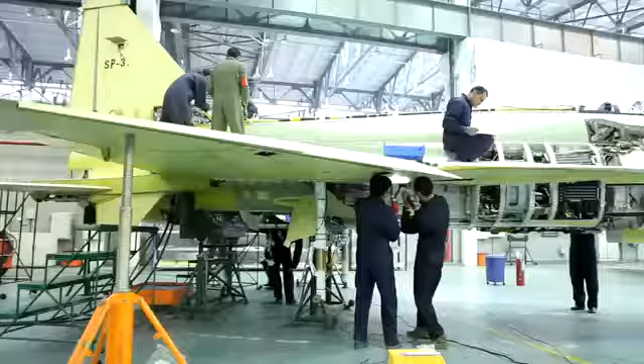Established 40 years ago, PAC is an aviation engineering organization equipped with aircraft, subassemblies, and avionics components manufacturing and MRO services, encompassing products ranging from primary flight trainer aircraft Mushshak and Super Mushshak to modern multi-role jet fighter JF-17 Thunder aircraft, along with aero engines and airborne avionics.

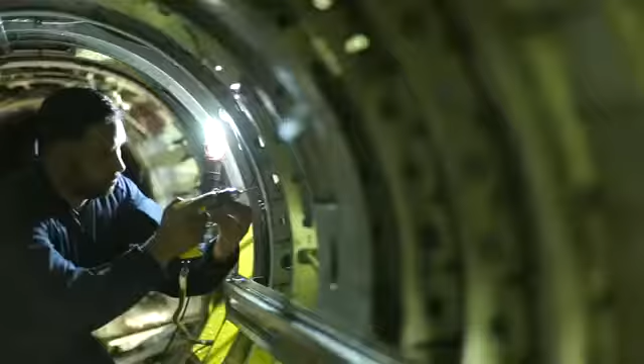The engineering setup is equipped with modern, state-of-the-art machines and established processes certified by International Aerospace Quality Standard AS 9100 Revision C, ISO 9001-2000, Boeing Quality Management System and NADCAP, etc., to name a few.

Precision machining, sheet metal work, composite and rubber parts manufacturing, special processes, surface and heat treatment facilities are the strategic business units of the organization.

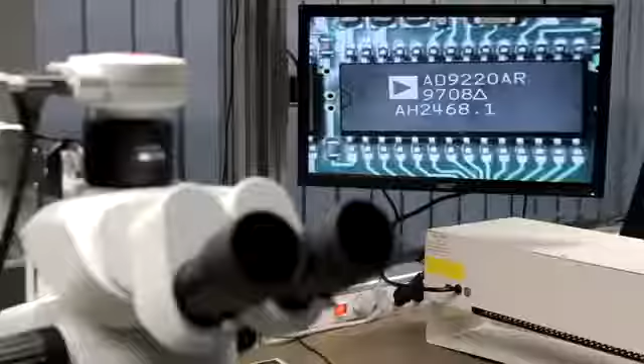PAC values its customers and believes in working closely by extending cost-effective engineering solutions through highly skilled human resources and advanced engineering processes at the most economical cost.

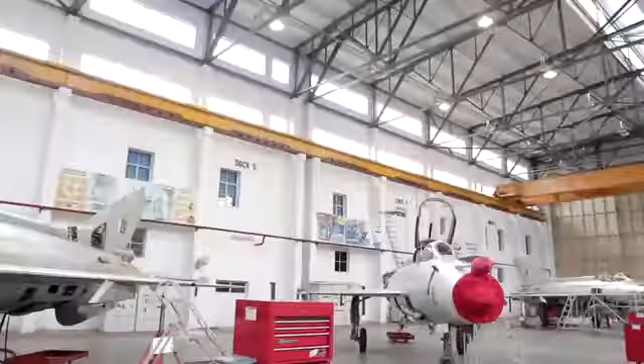Aircraft Rebuild Factory was established in the early 70s in collaboration with the People's Republic of China. Initially, the factory started overhauling F-6 aircraft, and with an ever-growing sphere of responsibility, the factory undertook the task of overhauling A-53, FT-5, Y-12, K-8 and F-7 aircraft variants.

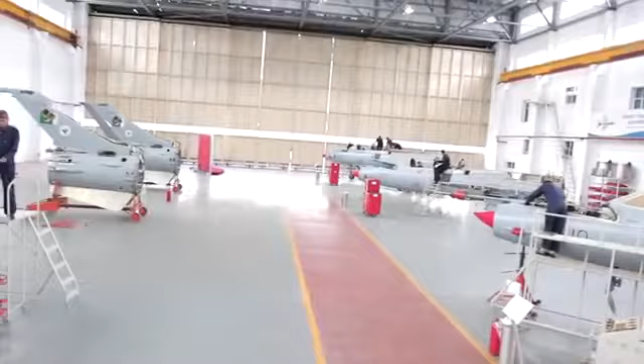Since its inception, ARF has evolved into a center of excellence for maintenance, repair and overhauling of Chinese aircraft, standing tall amongst MRO organizations in the world.

The MRO setup has a number of accreditations to its acclaim, which guarantee quality production. It is not only fulfilling the needs of Pakistan Air Force, but also undertakes overhauling and repair tasks of friendly countries, namely Sri Lanka, Zimbabwe, Nigeria, etc.

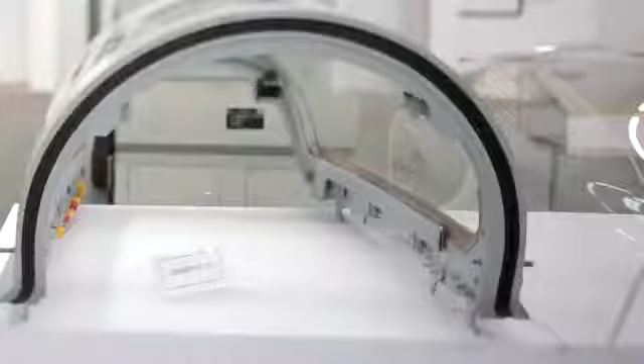The core facility has rich experience of manufacturing and overhauling canopies and windshields of Chinese T-37, Cessna, IL-78 and Mirage windshield partitions. It has also acquired the technology for manufacturing single-piece windshield. The competency is completely self-reliant and has ensured zero foreign dependency.

Production Support Group at ARF is a hub of metal parts manufacturing with diversified services like CNC and conventional machining centers, forging and casting, surface treatment, and NADCAP qualified heat treatment facility.

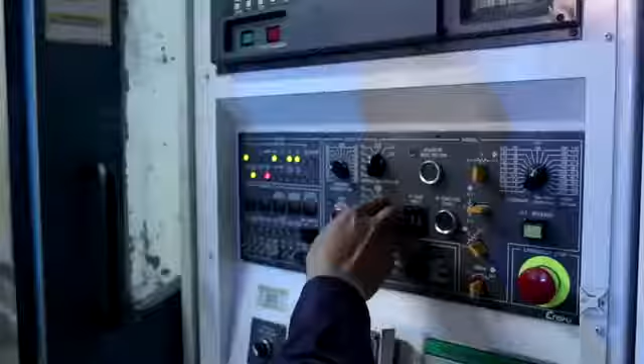Precision Machining Complex is a Boeing Quality Management System certified CNC setup capable of manufacturing aviation and military standard aluminum, steel and titanium alloy parts by using the latest CAD/CAM software.

The products are qualified by utilizing state-of-the-art coordinate measuring machines. PMC is manufacturing parts for Chinese origin fighter and Boeing 777 aircraft.

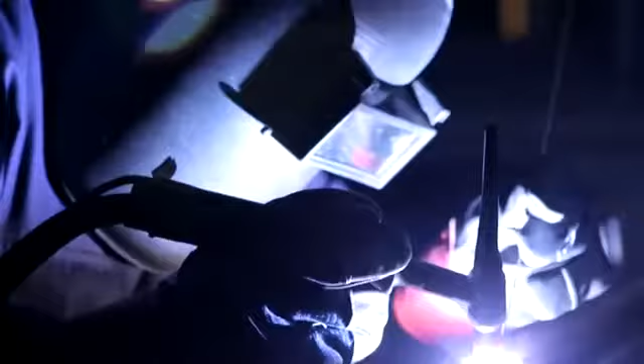Drop tank manufacturing facility is capable of fabricating supersonic tanks along with repair and testing of metal tanks for modern fighter aircraft. It features a wide array of sheet metal processing and welding facilities along with expertise in argon arc, seam, spot and electric welding processes.

Stringent stage-wise quality control ensures achieving the highest of aviation standards.

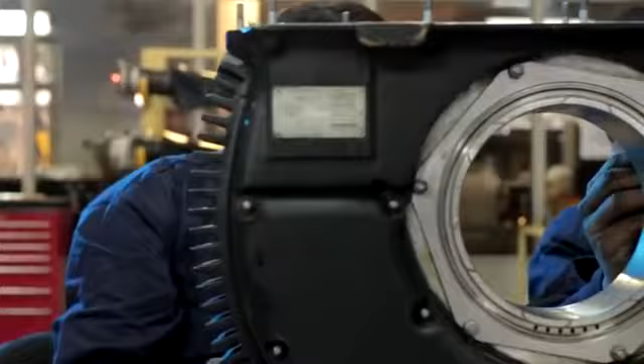ARF has progressively ventured into commercialization and acquisition of modern technologies. Establishment of the C-130 propeller overhaul facility is a recent success story in this field. It has been established in collaboration with Derco Aerospace and is certified by Hamilton Sundstrand. The facility has a broad capability spectrum and is fully conversant with latest aviation technologies.

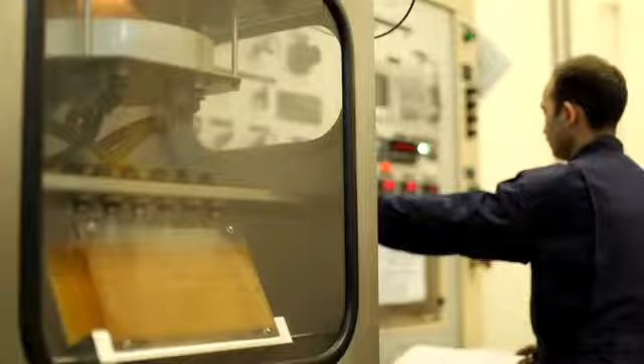Other than overhaul of C-130 propellers, it is also carrying out repair, fabrication, rework and overhaul of its accessories, including pump and valve housing. With the addition of quick engine change overhaul, it has become a state-of-the-art facility that is being offered to friendly countries as well.

Harness Manufacturing and Rework Center manufactures and repairs wiring harnesses of various types of aircraft. The capability spectrum includes a wide variety of harnesses. A harness is a complex combination of wires and connectors. This task is very delicate and requires high skill levels.

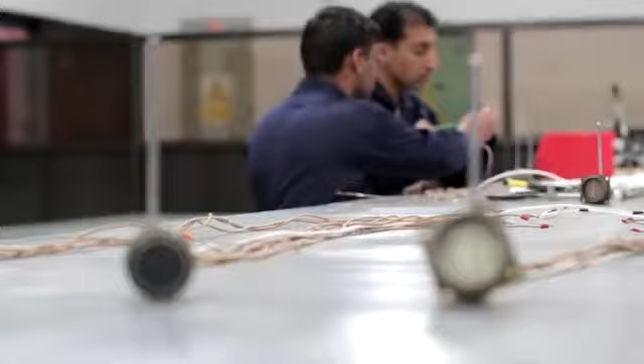Elaborate testing of all manufactured and repaired harnesses is carried out. The work center is qualified for rewiring of used aircraft with new harnesses. Equipped with laser marking, thermal transfer printing, and automated testing facilities, this work center provides all modern technologies under one roof.

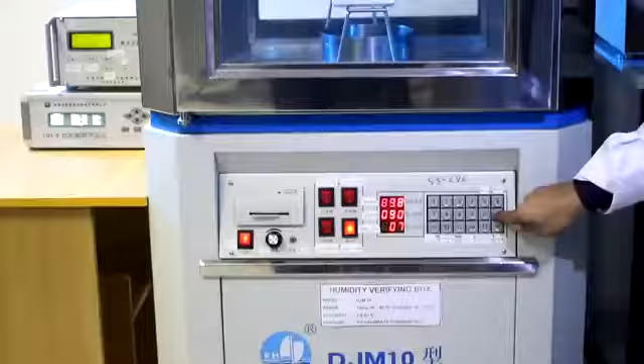Metrological Center ARF is one of the leading calibration and testing facilities in the defense sector of Pakistan for calibration of PMEs and testing of aviation and general industry parts. It is an ISO 17025 accredited laboratory.

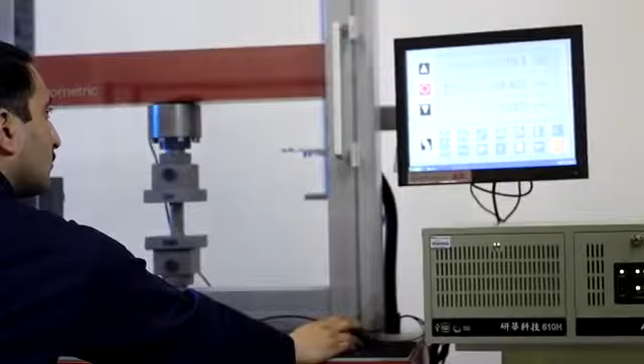Capabilities of this work center include physical, chemical, metallographic and non-destructive testing, besides calibration of PMEs related to length, pressure, mass, volume, force, temperature and frequency. The standard equipment used here has international traceability for its accurate functioning.

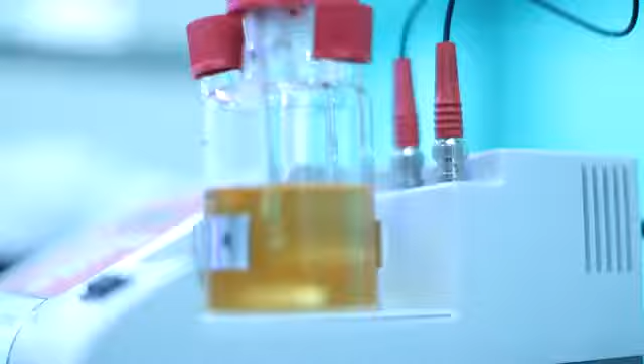It extends calibration and testing services not only to PAC and Pakistan Air Force, but also to various reputed public and private sector Pakistani and foreign organizations.

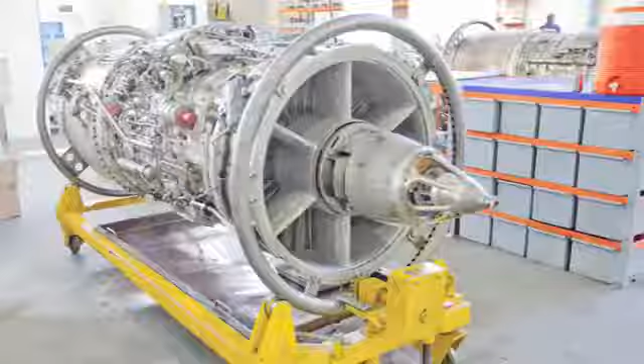Mirage Rebuild Factory was conceived in 1974 for in-country overhauling of Mirage aircraft and has ever since evolved into a center of excellence for maintenance, repair and overhaul of military aircraft and jet engines. It is duly certified by Dassault Aviation of France.

The process begins with the complete disassembly of the aircraft. The parts, components and accessories removed from the aircraft are routed to specialized setups for complete strip-down, stringent inspections and comprehensive repairs as per the overhaul manuals.

During the process, components that can be repaired undergo extensive repair procedures. In case parts cannot be repaired through any of the repair schemes, they are replaced to ensure perfect health of the aircraft. After assembly, the operation of each component is verified by extensive testing.

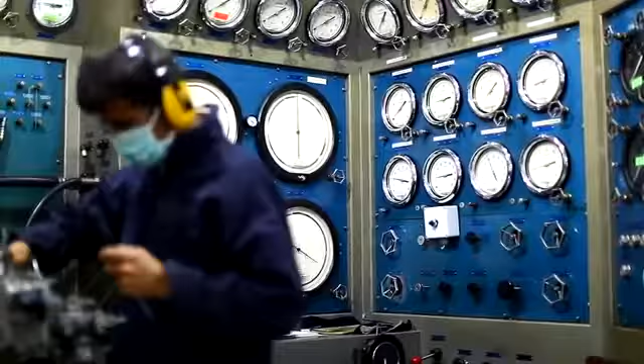The operation of these components is simulated on specially designed testers. These testers replicate close to actual operating conditions which these components experience on a flying aircraft.

Results of testing achieved on these components are strictly monitored, and it is ensured that the achieved results are within the prescribed limit set by the manufacturer.

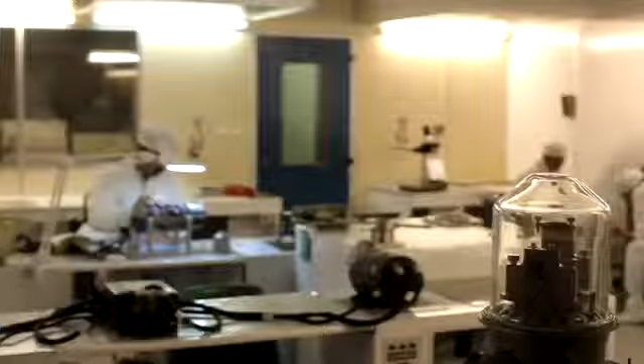The highly precise components requiring overhauling in a dust-free environment are overhauled in a special facility. The atmosphere in this facility is cleaned continuously to achieve the required air cleanliness standards.

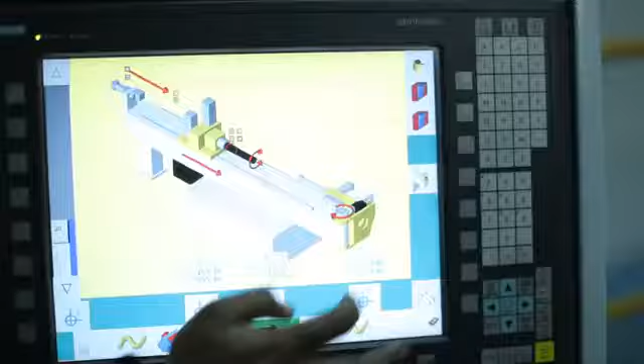The overhauling of aircraft is never complete without repairing and replacing the worn-out hydraulic and fuel pipes. MRF has established a 5-axis CNC-controlled pipe bending and fabrication facility capable of automatically modeling and manufacturing all aircraft hydraulic or fuel pipes. The modeling software interprets the model of the pipe.

The fabrication module uses the interpreted design to prepare new pipes of required dimensions and angles from straight lengths of pipes.

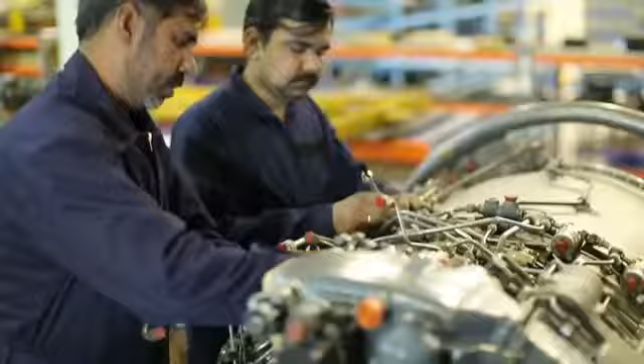To achieve self-reliance, MRF embarked upon the uphill task of establishing the all-encompassing setup for overhauling of engines of Mirage aircraft. Duly certified by SNECMA of France, the engine overhaul setup has become the backbone of Mirage fleet operations of Pakistan Air Force. Like the Mirage aircraft, the Atar engine is also stripped down to individual components.

All components undergo a thorough cleaning process to remove the contaminants accumulated during flight on the aircraft. The cleaned parts undergo non-destructive inspections to identify the existing defects.

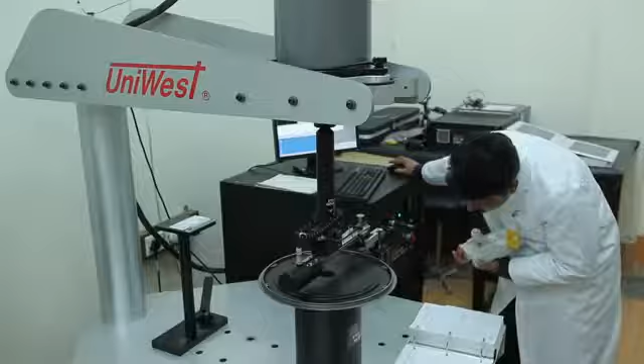Highly specialized radiographic inspection techniques identify even the minutest cracks existing in the parts. The radiographic machine is equipped with a robotic arm to position the part for accurate identification of subsurface cracks.

An elaborate setup of specialist NDI techniques is available for identifying microscopic imperfections in aircraft and engine parts.

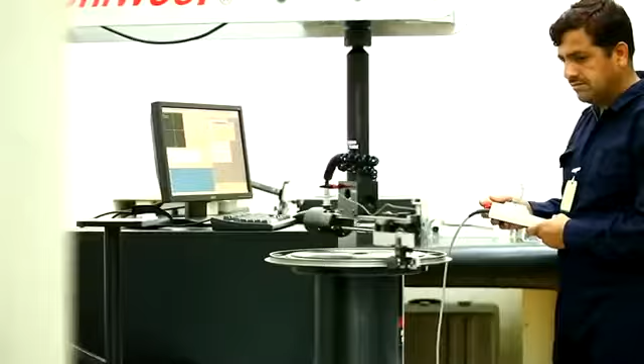Non-destructive inspections are also aided by a semi-automated eddy current inspection machine. The machine runs its probes on the predefined geometry of the part and identifies the existing defects. Use of the automated probes eliminates the chances of human error.

Crack identification on ferrous parts is also carried out by a state-of-the-art magnetic particle inspection machine to identify subsurface cracks. Over a span of more than 30 years, MRF has inducted numerous state-of-the-art technologies for maintenance and manufacturing of aviation parts.

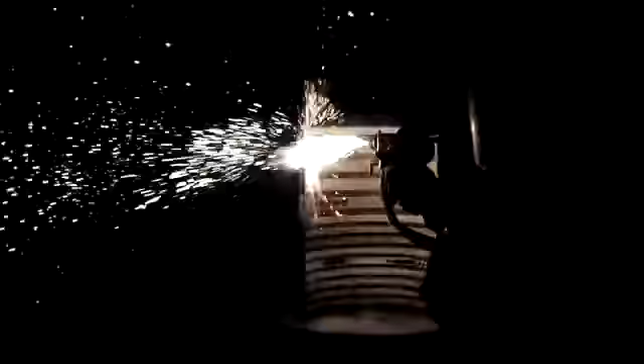High-velocity oxy-fuel and plasma coating techniques are used for seamless build-up of the parts that wear out during the operation of jet engines. Parts reclaimed by these techniques are given a new life and they get ready to be installed on the engines for the next span of their operation.

Pakistan National Accreditation Council and ISO 17025 certified precision measuring equipment laboratory is providing calibration services to keep the overhaul equipment ready to make precise measurements.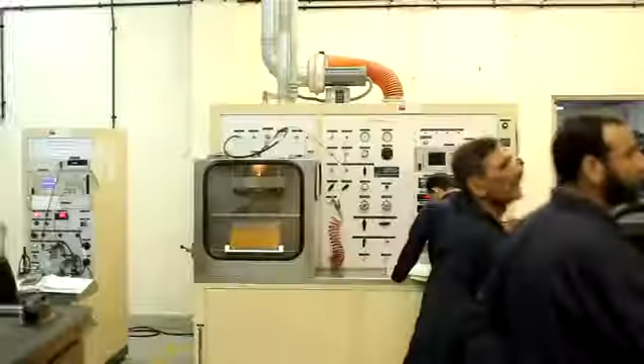Overhauling the engine accessories is a vital support setup required for successful overhaul of any jet engine. Meeting up to the requirement, MRF has set up an elaborate system for overhauling the accessories. The process begins with completely stripping the accessory down to its basic components.

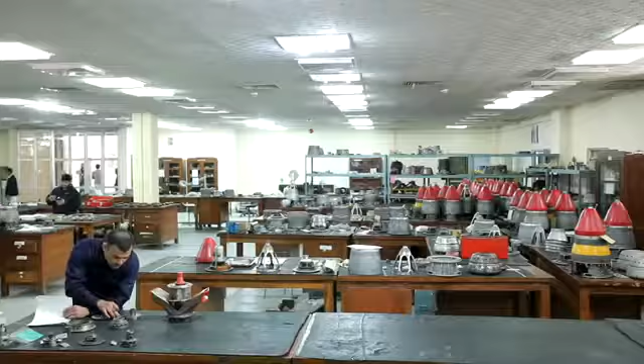The components undergo a series of elaborate cleaning and inspection steps, and the defective components are identified. As per the nature of defects, either the components are repaired or replaced, and then the accessories are finally assembled. The final step of overhaul is comprehensive testing of the accessories.

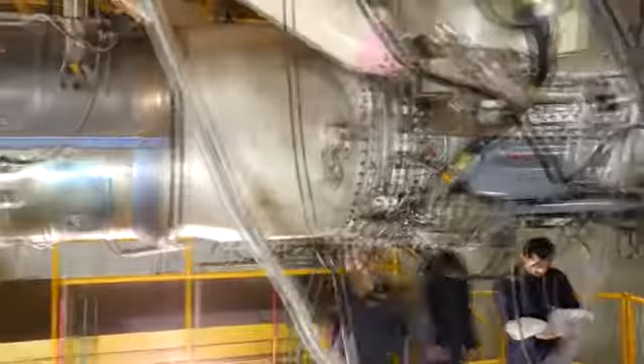On the last leg of its overhaul journey, the engine is tested on the multi-engine test cell. The test cell is capable of testing various types of overhauled engines from idle to their maximum thrust in afterburner settings. Closed-circuit cameras enable monitoring of engines with highest accuracy to determine the minutest flaws or fuel leaks, ensuring the highest levels of reliability.

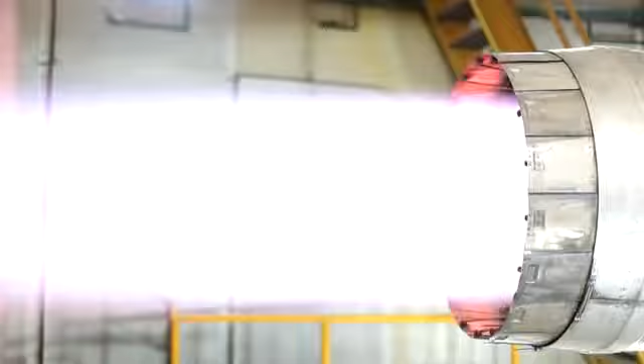The test cell control room gives complete controlling and monitoring capability to the technicians running the engine. The technicians operate the engine on virtually every power setting and check all the critical operation parameters. After satisfying all the required standards, the engine is declared fit for installation on a fighter jet.

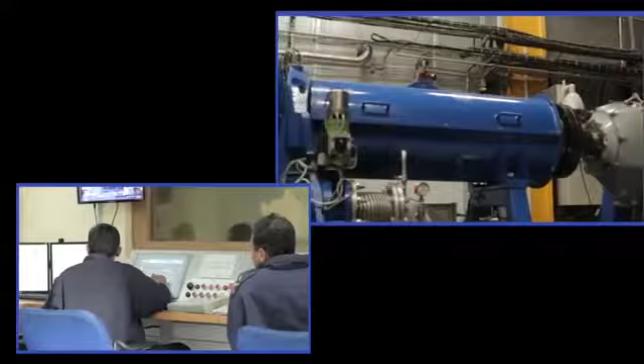The capability of the Mirage Rebuild Factory has been enhanced over the years to overhaul the engines of other military fighter and transport aircraft. In the same pursuit, a Rolls-Royce certified facility has been established for overhauling the T-56 engine of the C-130 aircraft. A continuous endeavor to enhance capabilities has led to the establishment of a state-of-the-art aviation overhauling facility for the TFE-731 Honeywell engine of the K-8 aircraft.

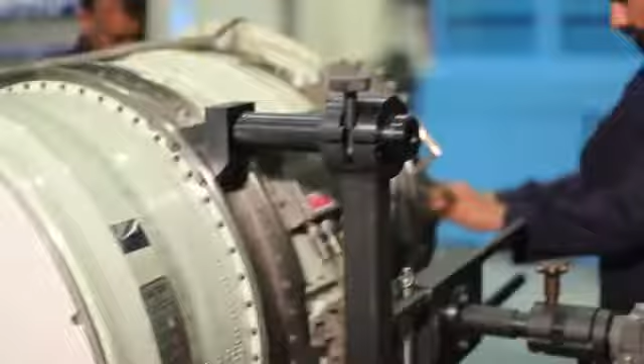After thorough ground studies, the first TFE-731 engine has been inducted in MRF for overhaul.

In 1989, realizing the requirement of PAF to maintain newly inducted F-16 aircraft, MRF assumed the huge undertaking of establishing the overhauling setup for F-100 engines of F-16 aircraft.

Pratt & Whitney's certified overhaul facility not only looks after all modules of the F-100 engine, but also upgrades 200 type engines to the more powerful 220E type engine, and has upgraded the entire F-100 engine fleet of Pakistan Air Force.

The ISO 9001-2008 Revision C compliant elaborate setup of quality control and assurance programs monitors the overhaul process for any possible deviations.

The outsourcing of Boeing parts manufacturing to MRF is a testimony of the professional appeal MRF enjoys. Over the years, MRF has become a blend of state-of-the-art facilities, outfitted to embark upon aviation-related MRO requirements from anywhere, whether local or abroad. Self-reliance, professionalism, and commitment remain the sole guiding inspirations for MRF.

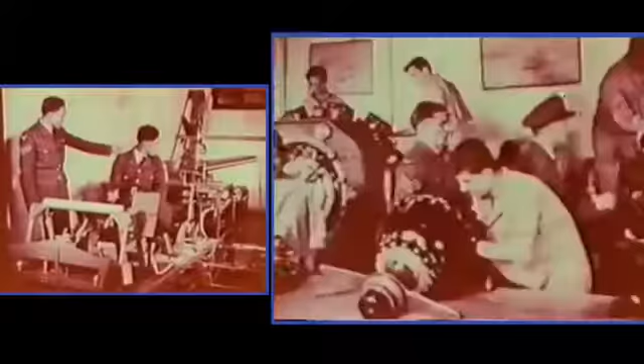Aircraft Manufacturing Factory was established in 1975 to undertake manufacturing of a primary flying trainer aircraft under license from Saab Scania of Sweden. The aircraft was named Mashak, meaning proficient, and was produced from kits provided by Saab.

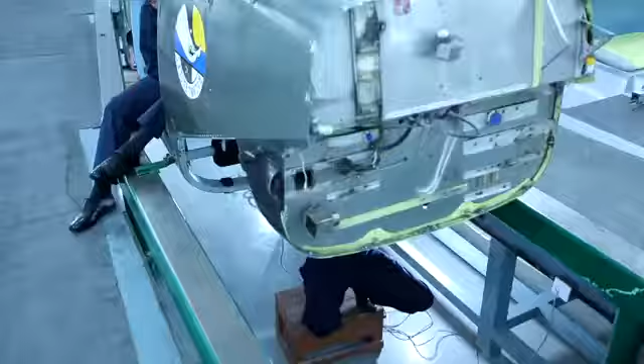After successfully producing 92 Mashak aircraft, AMF acquired the status of Original Equipment Manufacturer, or OEM, in 1981. Within just 30 years, AMF has produced more than 300 Mashak aircraft, successfully flying not only in Pakistan but also in foreign countries such as Saudi Arabia, Oman, and South Africa.

The Mashak not only meets the requisites of international aviation standards but also conforms to Pakistan and South African civil aviation standards. That is why it is the frontline aviation product of Pakistan.

During the course of manufacturing, AMF, in order to improve the design and performance, produced an upgraded version of the aircraft in the shape of Super Mashak.

Equipped with a Lycoming 260 horsepower engine, advanced avionics package, Garmin and Dynon glass cockpit, and side-by-side seating for instructor and student pilot, Super Mashak forms an ideal platform for a variety of roles.

Short takeoff and landing distance, higher G-load bracket, excellent stall and spin recovery, and above all, excellent after-sales spare and structural spare support are some of the key features rendering Super Mashak far superior to its contemporary primary flying trainer aircraft of the same class.

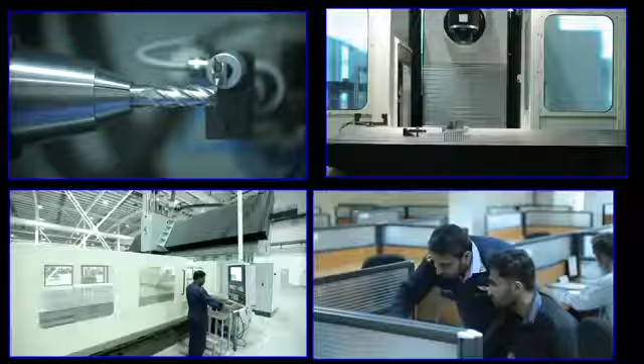The aviation industry in Pakistan has experienced tremendous growth in the last 30 years. Over the years, AMF's stature as an aircraft manufacturer grew manifold, with successive capability achievements to manufacture the jet aircraft trainer K-8 in the late 80s, the unmanned aerial vehicle Falco in 2008, and the modern jet fighter aircraft named JF-17 Thunder.

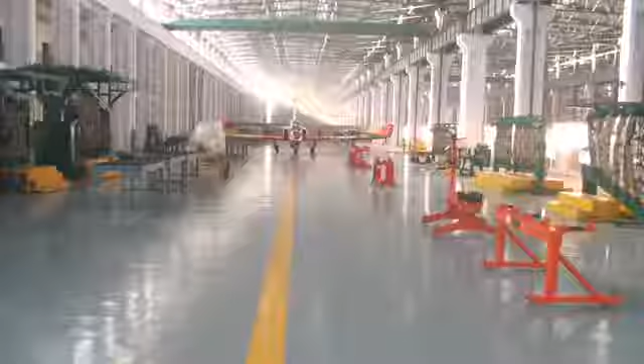Today, Aircraft Manufacturing Factory has the capability of manufacturing structural parts and aerostructure assemblies such as the horizontal stabilizer, elevator, vertical stabilizer, rudder, and front fuselage of the K-8 aircraft.

Keeping abreast of evolving trends in aviation, AMF decided to venture into manufacturing unmanned aerial vehicles through the latest carbon composite material processes. Pakistan Air Force, after a comprehensive operational and technical evaluation process, decided on establishment of a Falco UAV manufacturing facility at AMF.

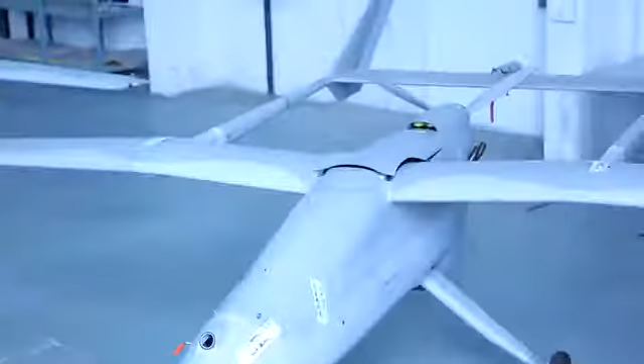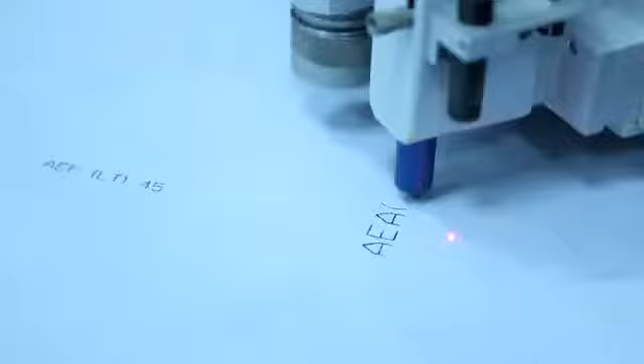During the first phase, 8 Falco UAVs were received in the form of semi-assembled kits. The final assembly and system integration of these UAVs was successfully accomplished at AMF PSC Kamra under the supervision of the OEM in the 2007-8 timeframe. During the same period, state-of-the-art equipment was also purchased to start co-production activities.

After commissioning of the equipment and training on parts manufacturing, the newly established manufacturing facility was qualified by the OEM to manufacture Falco UAVs to European quality standards.

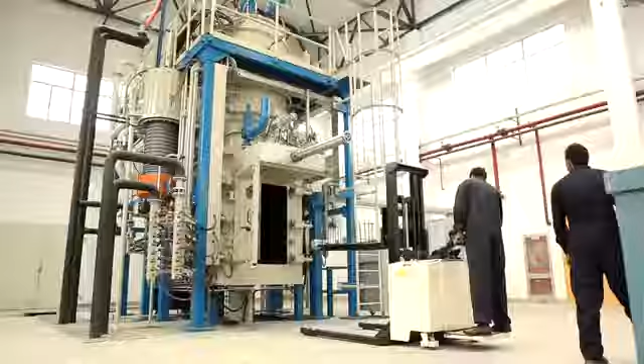An aviation industry is considered at its pinnacle when it has the capability of manufacturing a modern fighter aircraft. Today, AMF has complete infrastructure, core capabilities, and state-of-the-art technologies for manufacturing of the JF-17 aircraft.

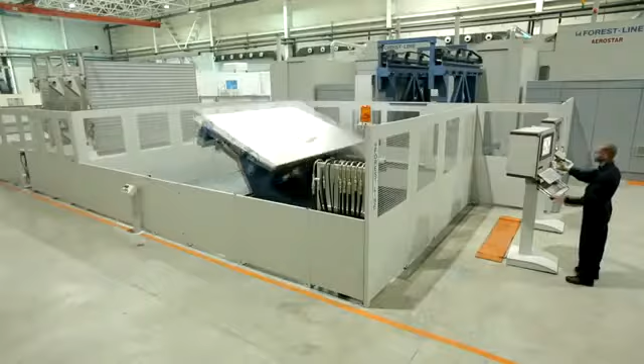The Machining Center for Production of Aircraft Parts is equipped with state-of-the-art conventional and CNC machines. Parts with relatively lesser accuracies are manufactured on conventional machines, whereas complex parts involving higher accuracies and profiles described by higher-order polynomials are manufactured utilizing CNC machines integrated with computer-aided design and computer-aided manufacturing systems.

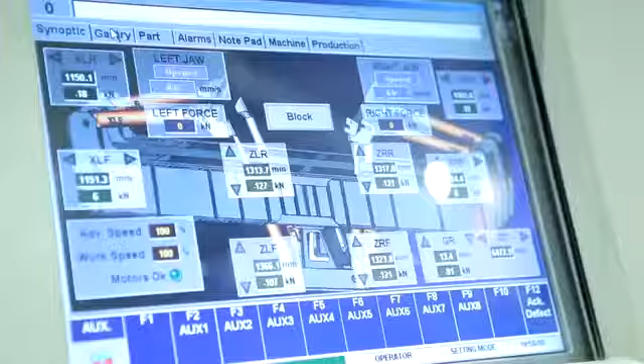The Sheet Metal Workshop for JF-17 parts houses an array of conventional and CNC machining facilities. Machines such as guillotine and nibbling shear, conventional and CNC stack routers, etc., are utilized for processes like shearing, routing, and sawing, whereas CNC shot peen forming, hydraulic quintus, fluid cell press, CNC stretch forming, and CNC punching are used for manufacturing parts involving sheet forming processes.

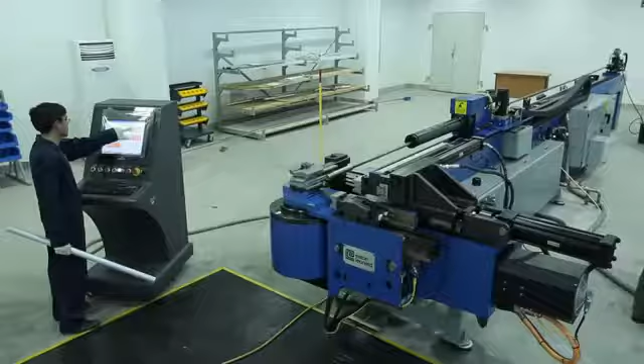Pipe manufacturing, emerging recently as a separate technology, caters to the requirements of aircraft hydraulic, pneumatic, and oxygen systems. It involves pipe bending, end fitting, testing, marking, and covering. The most typical equipment used in pipe manufacturing is the CNC pipe bending machine.

Special processes form an integral element of any modern manufacturing facility, as almost all sheet metal and machine parts undergo heat treatment, surface treatment, welding, and various other special processes during manufacturing.

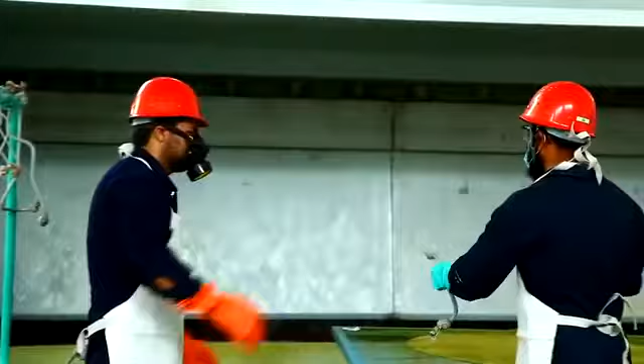Vacuum oil quenching furnaces, air circulating and conventional furnaces, etc., are employed for heat treatment, whereas chemical treatment facilities include anodizing, chromating, bluing, phosphating, pickling passivation, electroplating, primer painting, and chemical milling. Every manufactured part has to undergo a series of testing and inspection procedures from raw material till final stage at the Material Testing Center.

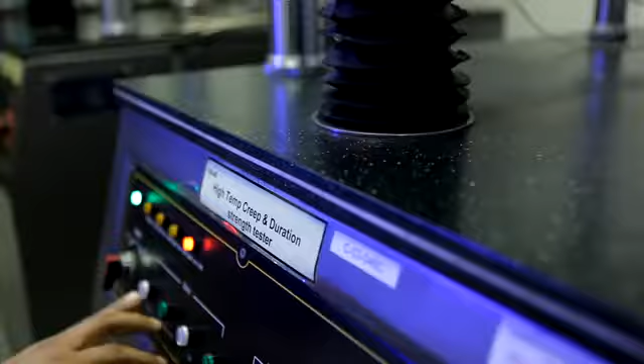The Material Testing Center has the capability to conduct all kinds of physical, chemical, and non-destructive testing of materials, including testing capabilities of all heat and surface treatment equipment for periodic qualification.

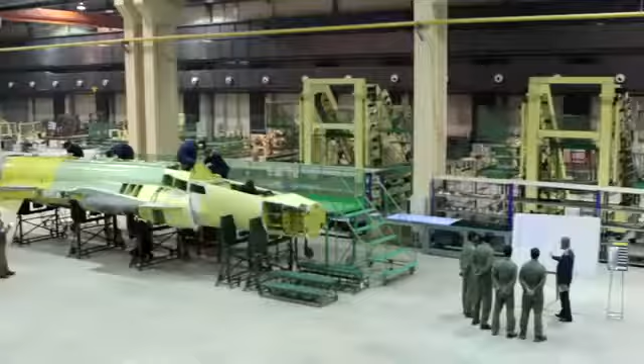The first phase of aircraft assembling starts at the Aerostructural Build-Up Facility. Hundreds of sheet metal and machine parts, pipes, and components are skillfully put together with the help of thousands of rivets to build aircraft subassemblies such as fuselage, wings, horizontal and vertical stabilizers, and ailerons.

The aircraft starts to take shape at the final assembly setup, where subassemblies, all system parts, engine, piping, and cabling are installed and integrated before sending the assembled aircraft to the flight test station for stringent power-on and functional checks of each and every system of the aircraft.

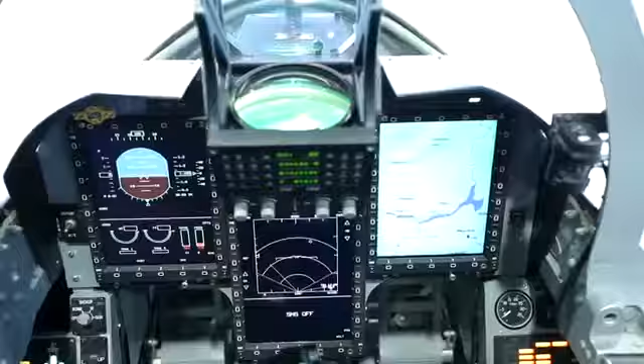This is followed by a series of aircraft ground runs and quality shakedowns before finally handing it over to the test pilot for yet another series of functional check flights to ascertain airworthiness.

The manufacturing of JF-17 Thunder fighter at Aircraft Manufacturing Factory has brought Pakistan amongst a select group of countries in the aviation world. Attainment of this capability in less than a quarter of a century speaks of the highest standards of dedication that AMF engineers and technicians showed since the word go.

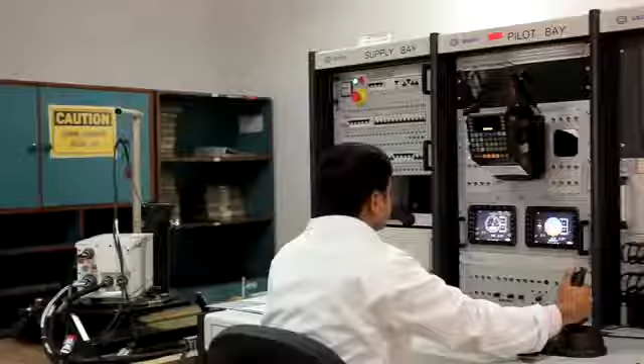Avionics setup of Pakistan Aeronautical Complex, known as Avionics Production Factory, was initially established as the Radar Maintenance Center in 1983 for overhaul and rebuild of ground-based radar systems. In 1989, it was transformed into a full-fledged avionics factory with ability to handle avionics as well.

Today, this factory, with its state-of-the-art facilities, can undertake production of different types of avionics as well as commercial electronics equipment while ensuring high-quality standards as per the requirement of Aerospace Standard 9100C.

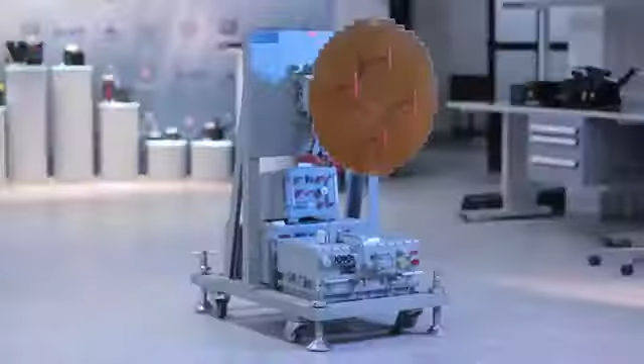The factory has produced numerous avionics systems like Grifo 7 and KLJ-7 airborne radars, radar warning receivers, identification of friend or foe systems, digital, audio, video and crash recorders, various mission computers and navigation systems. Most of these systems have been co-produced in collaboration with Chinese and Western manufacturers.

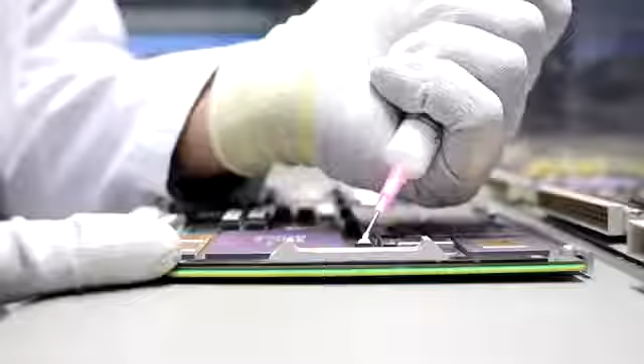The factory has also produced various commercial products such as PAC pad called Takhti 7, PAC notebook and e-book reader.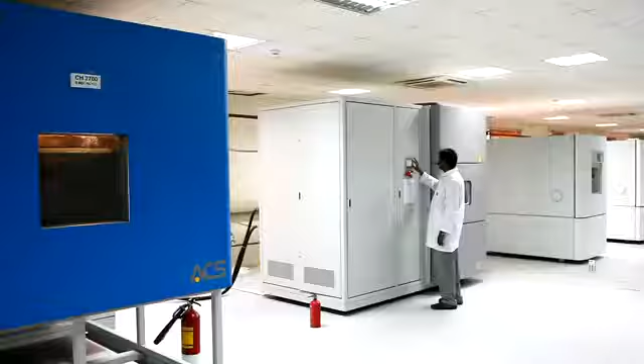The avionics production facility at APF can be divided into 6 major segments: design and development, avionics integration, production line, testing line, specific system department, and environmental stress screening facilities.

APF can undertake design and development of avionics systems based on user requirements and provide complete solutions from concept to life cycle maintenance of the products. The prototype avionics systems are designed using computer-aided design and simulation tools.

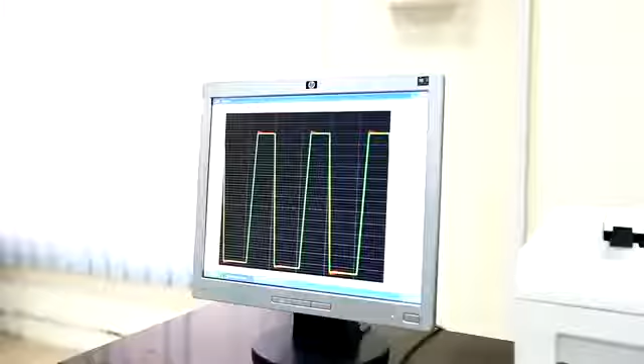The prototype systems also undergo electromagnetic interference and electromagnetic compatibility and environmental qualification. Systems developed at APF have qualified and are flying on fighter aircraft.

The developed system prototypes are functionally tested and integrated in the Dynamic Simulation and Integration Laboratory known as DSI. The facility can also undertake integration of off-the-shelf systems with an avionics suite.

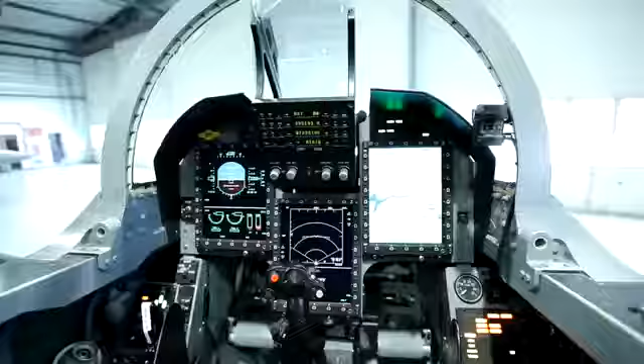Being a certified avionics integrator with years of experience, APF has developed core integration technology for meeting requirements of new fighter aircraft and upgrades and modifications as well as retrofits in older aircraft.

The systems are validated through hardware in the loop ground testing in simulated environment and are subjected to flight trials before final qualification. After successful qualification, serial production is undertaken utilizing semi-automated and automated machines.

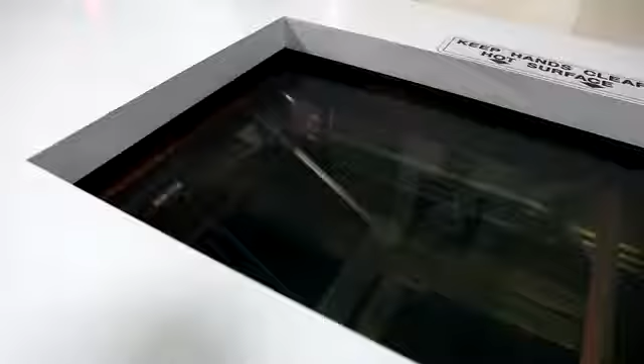APF is a qualified production vendor for various companies, and its generic production line employs stuffing of surface-mounted and through-hole electronic components on bare printed circuit boards.

PCB stuffing is a multi-stage process involving PCB inspection, cleaning, and drying before these are ready for components installation. The processed bare boards are then passed through automated assembly line which installs the components.

Few components like connectors, etc. are however installed manually. The assembly line is configured to adapt to production of any types of PCBs.

The completed PCBs are inspected using optical and X-ray inspection systems for faults before being passed for testing. The standard of workmanship during complete production process conforms to requirements of IPC 600 and 610D standard.

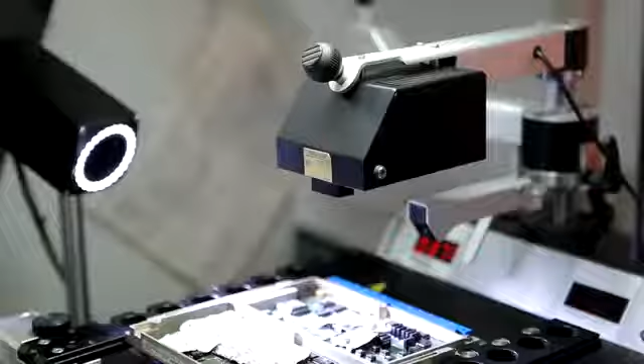Stuffed PCBs are passed to generic testing line for in-circuit and functional testing. These PCBs are powered on and tested to ensure serviceability of individual components and complete functioning of PCBs.

The testers are adapted for testing any electronic assembly. The testing facility is generic and comprises of sophisticated test stations. APF has the expertise to develop complete testing solutions, including development of software programs and mechanical adaptations for testing.

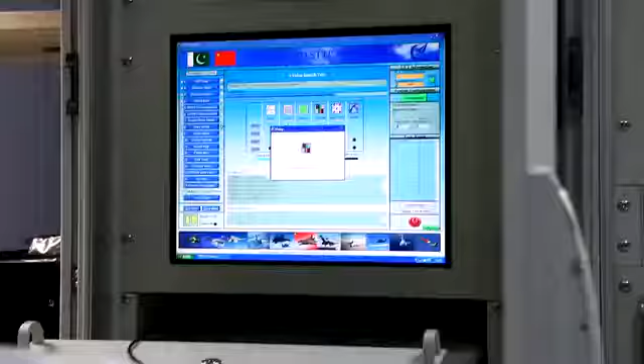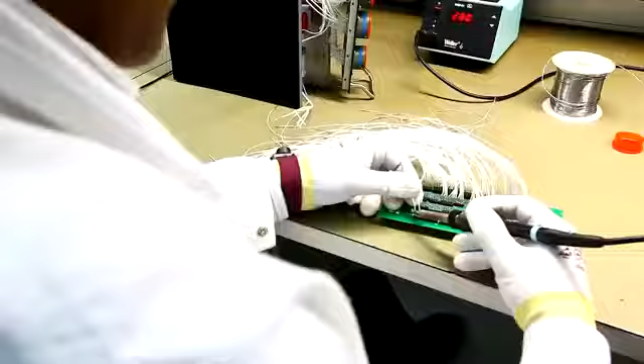When PCBs have been stuffed with components and tested, these undergo conformal coating before being fed to specific system department. Here, these shop replaceable units, along with other components, electrical and mechanical wiring, and harness assemblies are put together as a line replaceable unit for final testing of system.

Since the processes require unique procedures for each system, there are separate assembly and testing areas for every system.

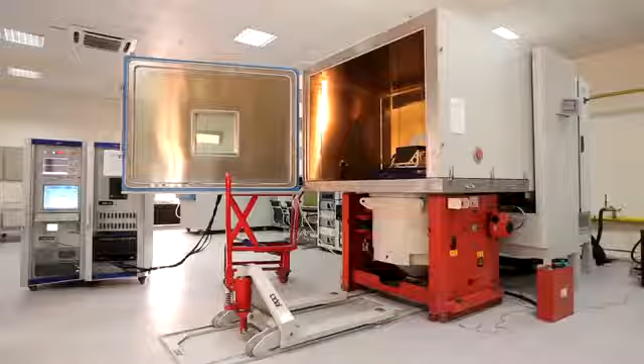Once a system is ready, it is passed over for environmental stress screening, where these systems are exposed to practical military environment with the help of thermal climatic chambers and shakers.

The aim of this strenuous testing is to ensure that the equipment conforms to actual aircraft environment as per requirement of Military Standard 810D. The systems that pass through this process are guaranteed to perform reliably when put into operation.

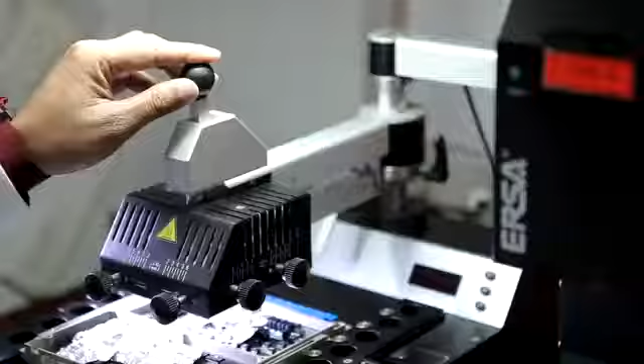Avionics Production Factory also provides life cycle maintenance for these airborne avionics systems. Factory employs skilled manpower with years of experience in repairs.

The facilities are equipped with latest test and measurement equipment, and repairs are undertaken as per international quality standards to ensure original equipment manufacturer specifications.

APF also carries out overhauling and refurbishment of low-level and high-level ground-based radars, especially Mobile Pulse Doppler Radar known as MPDR. The facilities available with APF are electronics modules repairs and testing, cable and harness repair and manufacturing, which includes RF, signaling and power cables, antenna structural repair and testing, troubleshooting and repair of hydraulic systems, gear testing facility, and radar vehicle overhauling.

Overhauling of radars give a new life to the old radars and are considered fit for operations for another life of 8 to 10 years. The factory has so far overhauled more than 90 MPDRs and TPS series of radars.

APF has come a long way to acquire the knowledge and skill in the field of quality production and repair of avionics equipment and overhaul of ground-based radars, and looks forward to enhance this capability further to achieve the excellence.